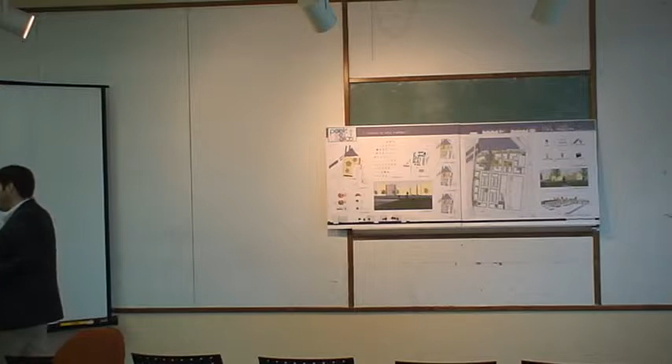I haven't started it, I've only just started fine. I'll eat peanut butter, I feel like I will eat peanut butter. Order, it's fine, eat it.

How do you spell functions? How does one spell functions?

And I got my hair done. I can do a lot of things in one night, but I can't do one. You tell me to read 10 things, I can't do it. You tell me not to do a PowerPoint cupcake, I need 10 things, I can do it.

So this is Vincent. Nobody else, right? Hey, Carolyn.

Can I spell some functions? Some what? Oh, I know how to do that.

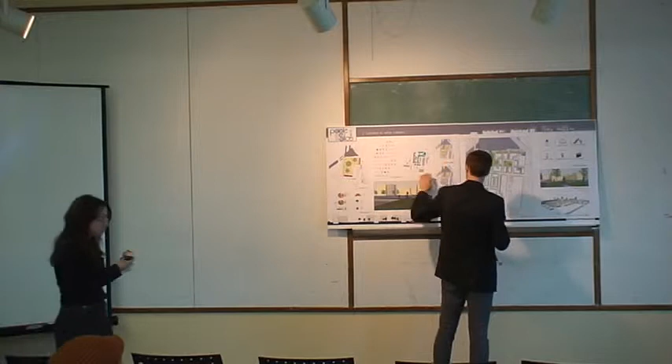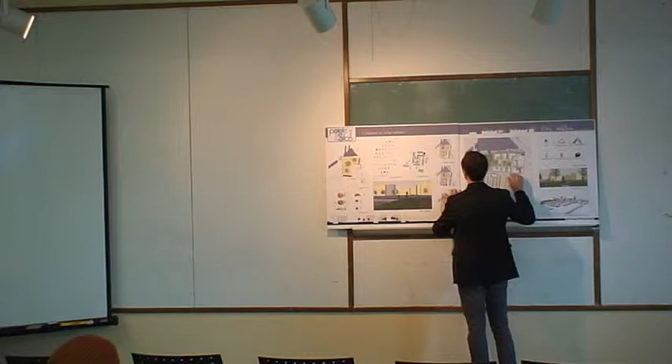You can save it as a PDF and you can still click, while I'm doing this, just in case. Yeah.

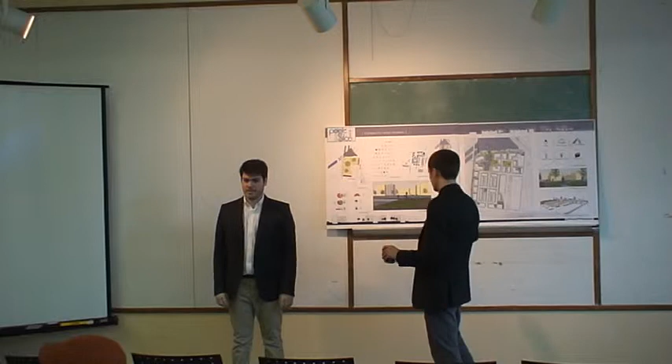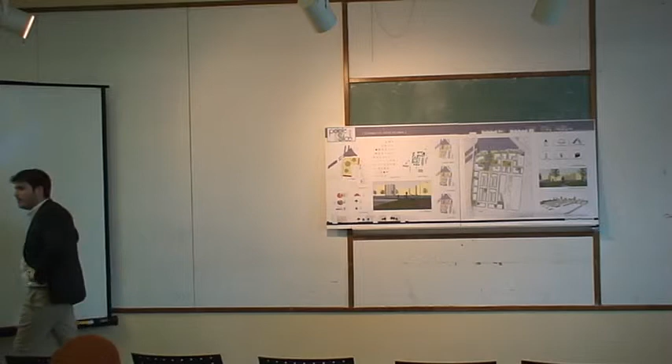Oh, wow, no, but it was kind of like, I had to get my costume first. Sorry about that, well, I guess before talking to her. No, we share. We share.

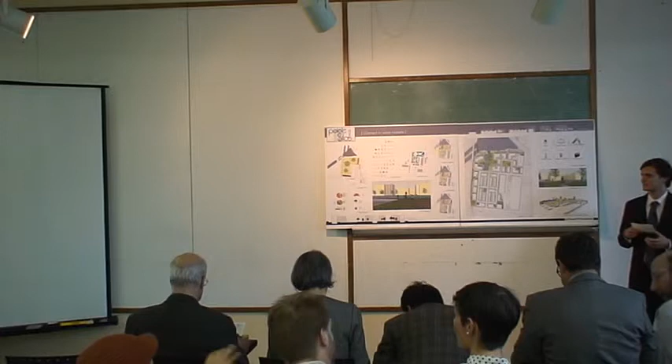Okay everyone, yes, so good afternoon everybody. Our project aims to redevelop the Wellington Basin area by transforming it from an industrial use into a mixed-use development that will have residential, commercial, and some light industrial uses.

So when we were first tasked with coming up with a design for this area, we wanted to look at the general context of the surroundings in order to better understand what needs the community have. We found certain issues and certain strengths which we really wanted to address in the design.

Three main issues stood out to us. The first one being the physical isolation of this site. There's barriers to the west in the train track. The bridge acts as a barrier to the south, and then you have another barrier to the northeast of the site.

The second issue is that of the highly mobilized community groups in the surroundings, which we thought was very important to take into consideration at the design phase. They have very high expectations as to the provision of rental, affordable, and social housing, as well as green space.

The third issue is that of the environment. Right now we know the site is very contaminated, and we wanted to make sure to design features into our site in order to remediate that situation and mitigate that risk.

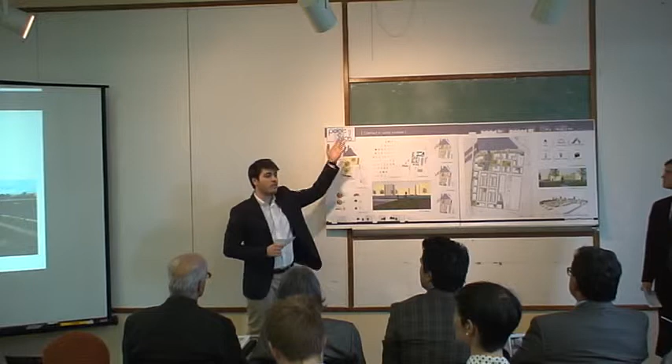In terms of strengths, well, there's the beautiful views from the site. You have views onto the canal, views onto downtown, and views onto what is now considered one of the greatest symbols of industrial heritage of Montreal, which is the Farine Five Roses sign, right to the northeast of the site.

So from this contextual analysis, we went and we decided on a vision that we wanted for this site. It was to design a project that addressed the issues of the site while putting forth its strengths. We wanted to create value for its residents and for the residents of the surrounding areas.

So what we did was we came up with 6 different guiding principles that would help us through the design phase of our project. These 6 are water, social equity, industrial heritage, the concept of human scale, the idea of the creative corridor, and retaining some employment on the site. Let me explain these different principles.

The first one being water, we have 3 main things we wanted to address with the theme of water. The first one being the importance of the Lachine Canal. We think it's very important to not only open it up to the residents of the surrounding communities and of the site, but also to bring the water into the site somehow.

During the contextual analysis, we realized that many developments along the Lachine Canal were actually closing off the canal, which we thought was a big problem. So we wanted to ensure equitable access to the canal and waterfront for all residents, which is why we created different connectors through the site to make a clear connection from the inner neighborhood into the water. The other goal was to manage our water in such a way that we would reduce the strain on municipal systems, which Christian will talk about later.

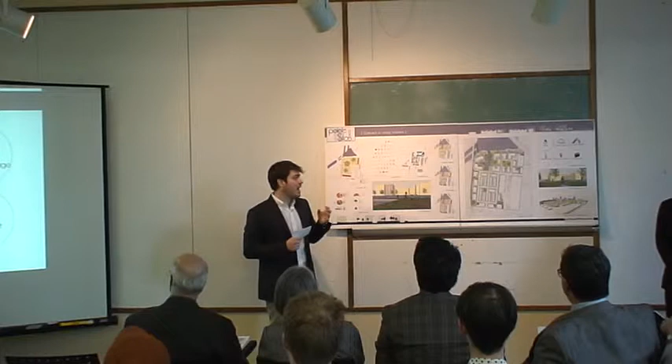We wanted to do this because, first of all, we think the presence of artists and creative types can act as a catalyst for the development of a sense of community in areas, and they could act as our pioneers onto the site. From that, we can gain a real sense of identity and character. Second, we feel we can leverage the surrounding commercial and residential developments from our regions.

The sixth and final guiding principle is that of employment. Right now, the master plan states that this site is actually zoned as a site for employment. Although we think this might not be entirely appropriate for our vision of the area, we feel that keeping some form of employment on the site is very important for various reasons.

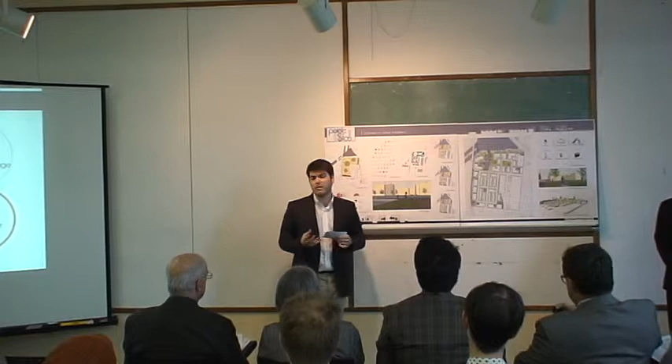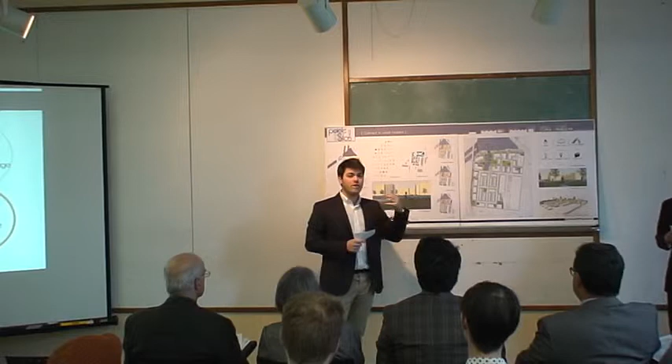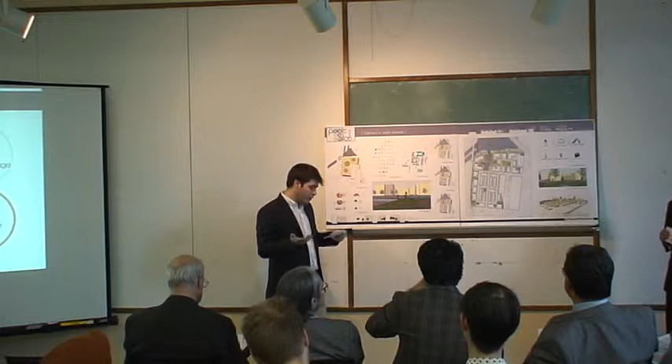First of all, we value communities where one can live, work, and play. Second, we feel that having long-term tenants right from the get-go can really stabilize the development, both financially and from the point of view of community. And third, we think it's a strong selling point both with the borough through the process of getting this project accepted, and with the surrounding community, which demands employment.

So now that I've explained these key guiding principles, I'll let Christian talk about the features that relate to these.

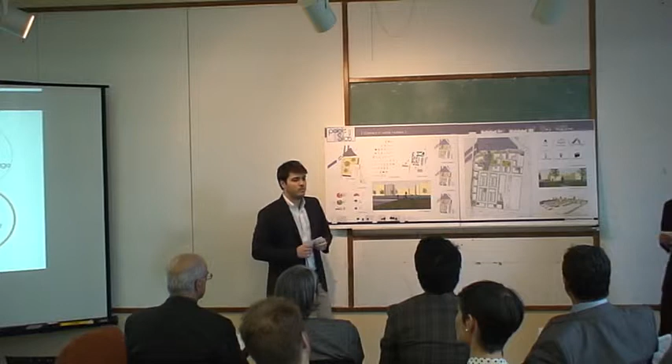Thank you, Vincent. For the purpose of explaining our six guiding principles, I'll take you through the different parts of our plan that we have identified.

The first of these, and the focal point of our neighborhood, is the Wellington Basin, located here on our master plan. We propose widening the Wellington Basin to its original width so that it could recall its importance as a key infrastructure piece in what was once the cradle of industry, the Canal Lachine. We also feel it can create value for surrounding properties if we widen the basin, which would then have good frontal access to the park and to the basin itself.

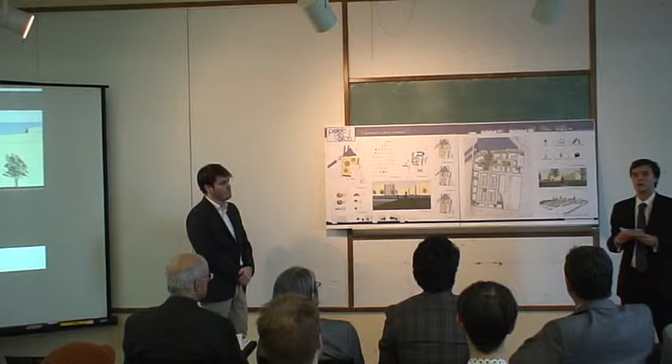Within the basin, we proposed a bioretention pond that would treat stormwater runoff and help us meet one of our guiding principles of good water management design, while potentially reducing costs of sewage management.

Moving further east, we have our second focal point, which is the old silos located here on our master plan. As you can see, we've partitioned the silos into two separate parts, the north and the south. The northern silos are retained fully as they are, but they are not inhabited.

Nonetheless, they are included in a new residential building that will give onto the canal and provide good views of downtown. On the other hand, the southern silos will be integrated into a public park, and only the base of the silos will remain, so it won't be fully built out.

We envision the landscaping of this public park could be kind of like vegetation overtaking the old industrial building. At the base of the park, we also propose perhaps something like a plaque that could recall the history of the site, while also explaining the importance of the silos for the identity of the community in the present day.

We also feel that the feel of the park would be one of a kind of transitional space where the old industrial history of our site meets the new, dynamic Pointe-Saint-Charles.

Moving further east from the old silos, we have Tate Park located here on our master plan, which recalls the existence and approximate location of the dry dock that once existed on our site.

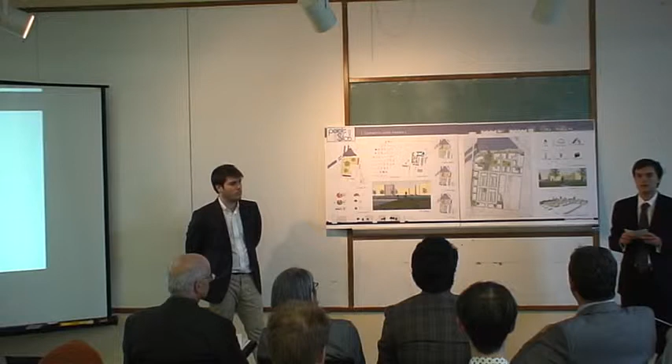We feel that it's important to provide public access to the canal for the whole community, and so there is a public access way that goes through in between these two buildings located on our site. This would include a water feature that would also serve an environmental function.

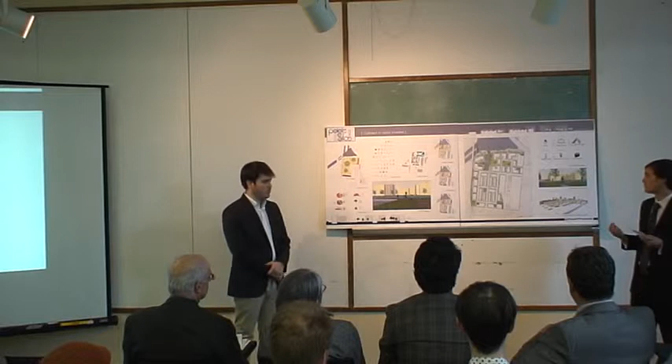As mentioned by Vincent, we really wanted to stress equitable access, and so there's access to this park from the west through this pathway, and to the east to our creative corridor, which I will explain next.

In the easternmost portion of our site, we have our proposed creative hub. Now you might ask, why here? Why create a creative hub here? Well, we have several reasons.

First of all, if you look east of our site, there is Espace VERRE located on Mill Street, which is an artisanal space. There are also two heritage-listed buildings that could also house artists in the future. So we wanted to really latch onto that as something that could define our site.

We also looked at past precedents, for example in Rosemont, where artists were included in investment proposals and actually helped create value. We thought this could help create value for our site too, and that it was a good way to do so.

But as you know, artists need one thing that is particularly hard to come by: affordable space, both to do their work and somewhere affordable to live.

We handle this in two specific ways. First, we have the old industrial building, which will be cheaper to rehabilitate since it's not new. Within this building, we're proposing to pay the first two years' rent of any artist who comes to work here, while subsidizing subsequent years, and also providing social and affordable housing throughout the site that would be available to the artists.

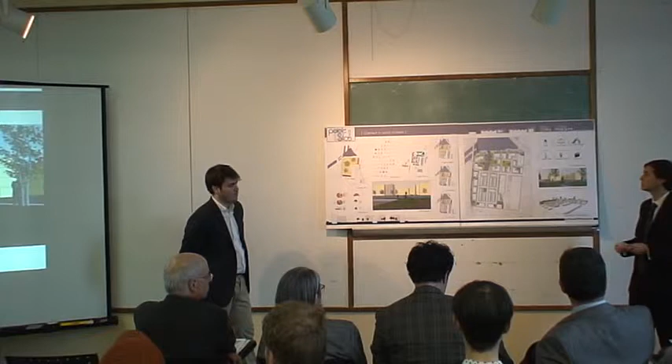I will deal now with the southern section, which stresses a more human-scale environment that is eminently walkable. So you have 3 to 4 story walk-up apartments, with apartments on each level and good backyard space. You have a nice street wall too that isn't overwhelming. This would also be our family space, and it is where, if you look at our affordability level map, most of our affordable and social housing is located.

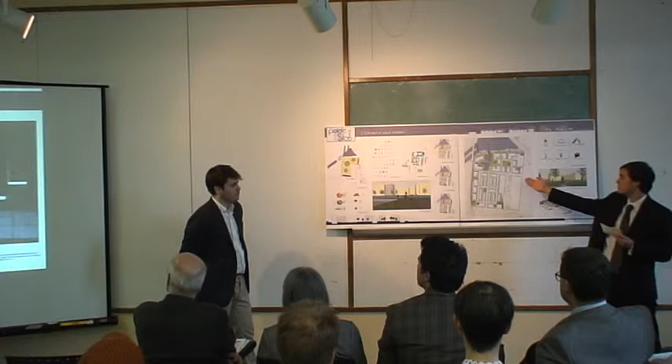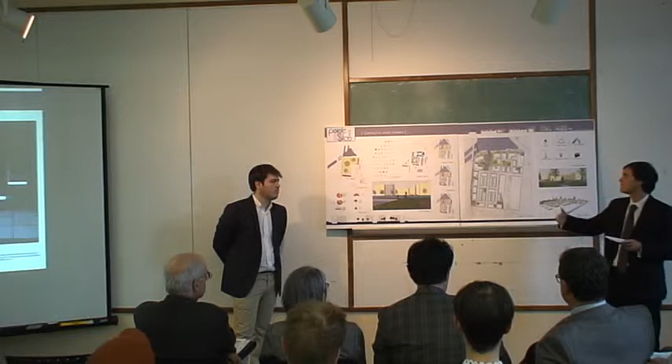Within the southern section, we have a pedestrian tunnel that goes under the railway to provide access for our residents to surrounding areas, as well as providing them access to our site so that they can visit the Wellington Basin and the Creative Hub.

Here we have a proposed green wall to hide the Loto-Québec building, which we think was kind of a barrier. It's not nice.

And as well, we have rain gardens on our sidewalks that will extend the idea of water further south because the basin doesn't go that far south, and we think that this is one of the key selling features of our development plan. Overall, the plan works by creating links between the different parts.

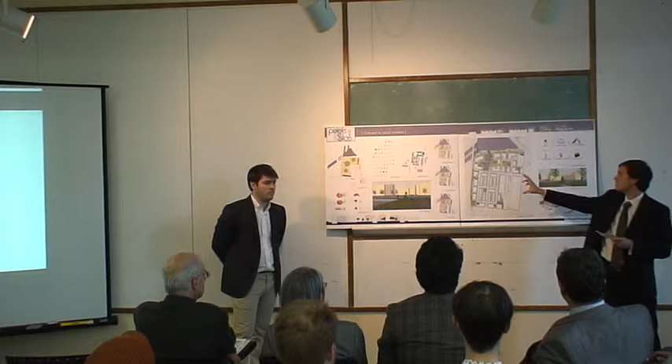So you have a link here that I described earlier from the Wellington Basin through the Tate Park to the Creative Hub. You also have a walkable grid on the south part, so we think that this is, again, a human scale environment that will work well.

Now, in terms of the financial analysis, while the 6 core principles were integrated throughout our planning, we also looked at financial viability in every step of the planning process. To do so, we sought out every possible avenue to mitigate risk.

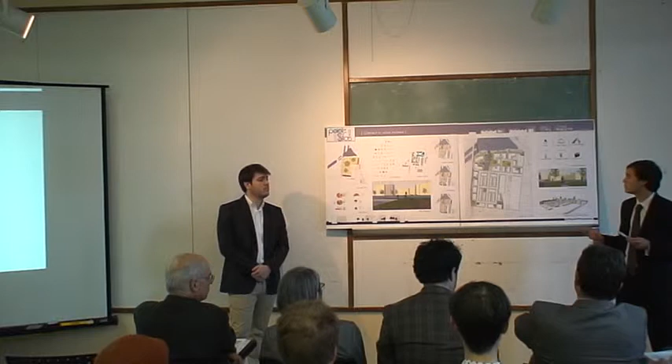For example, by including 15% social housing, 24% affordable housing, dispersing it throughout the site so that it's not segregated, and in doing so, responding to community mobilization and pressures that will want some perhaps more commitment from developers than purely a profit motive. But again, we are profitable.

And in terms of the phasing, we have a 10-phase plan, and generally it will take 10 years, we expect. But it's relatively flexible because we're planning to deliver it in portions so that not one portion has to be done right away. You can respond to market conditions.

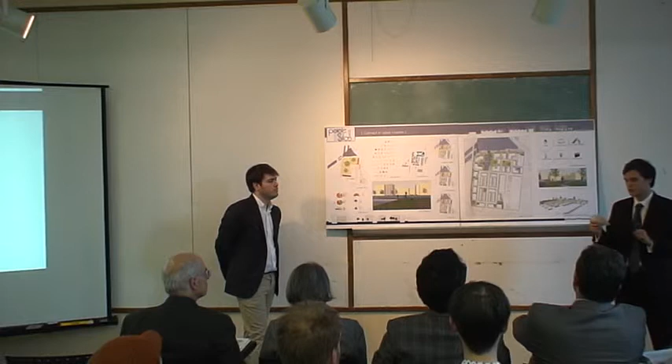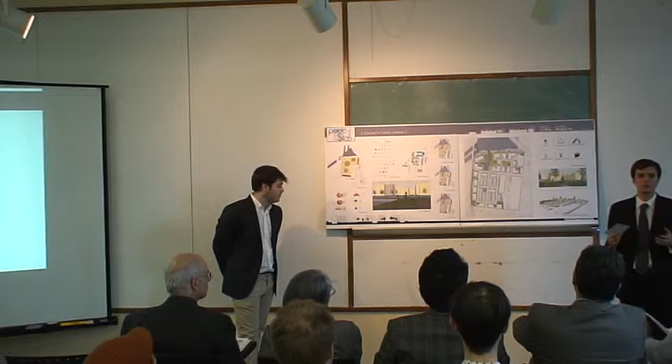And also we would start with the key infrastructure features first because they help to define the site from the get-go. So while the 6 guiding principles informed our plan in general, it will also make a project that is already very profitable, good for the community and for the environment, something that we feel is important as well. So I would now invite my teammates to come and answer any questions that you may have.

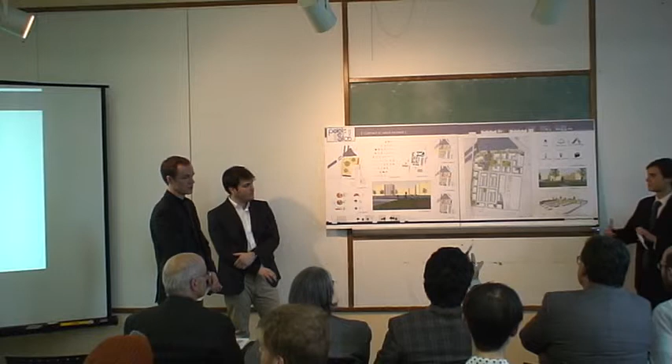Yeah, it wasn't clear to me because the borders are pretty small. After the color, where's what? Like the density and the social, and is this townhomes in the middle of the grid?

Well, yeah, just a quick review. These here were... I'll show you. Affordable, yeah. Basically, these are triplexes, all these here.

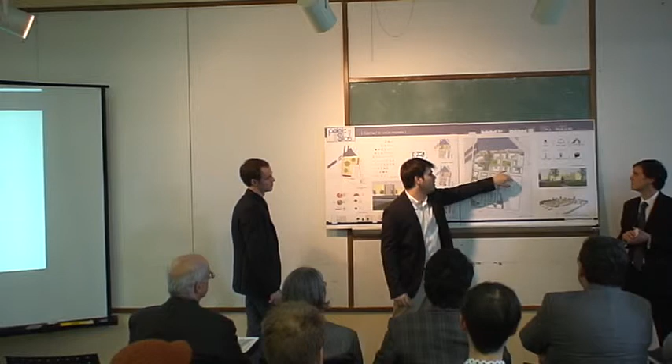And we have some 4-story walk-ups. Here we have up to 6-story walk-ups. Here is actually a mix of commercial and office use on Bridge. This is kind of more of a luxury condo development, higher, I think up to between 6 and 8 stories. We have a 10-story building here, and then a very beautiful building that's there right now, which we're keeping. We're actually changing the building adjacent to it, transforming that into some sort of office artist space.

Yeah, work loft, exactly. And then right next to it is some more of the same, and you have the social housing right around here.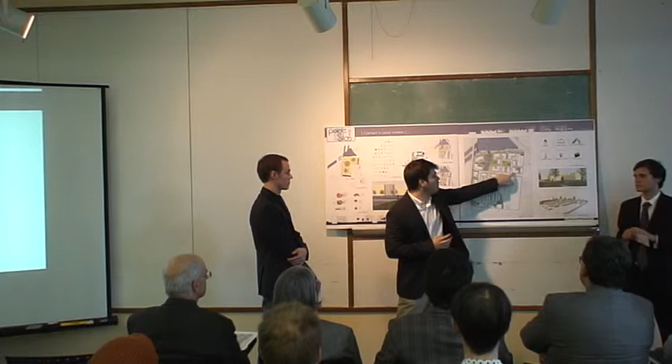No, social housing is here, and then we have some more here, here, and then this building here, which is near the parking, for the family aspect.

Yeah, that was one of the main objectives in social equity, to not segregate them. This is something we discussed also, is you reach 11% park space.

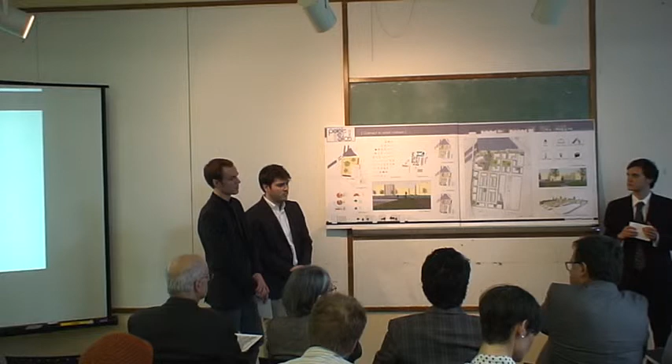Obviously you have distributed park space throughout the site. It would be interesting to see how you use those parks. Do you have a special vision on them serving different purposes? Is there one for small kids, because there's one by the Raceway on Bridge Street that looks more like leftover green space.

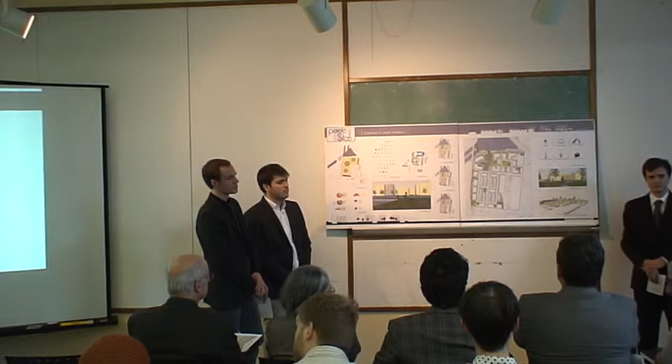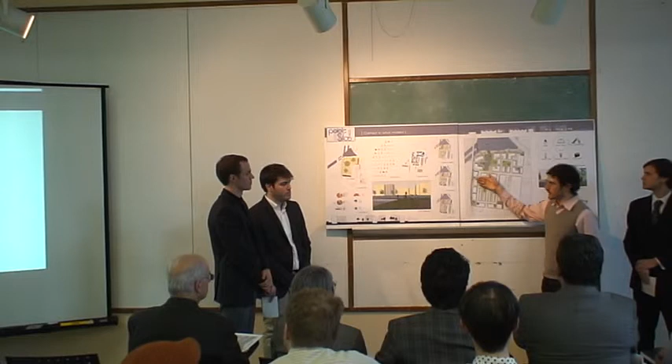Both? Yeah, so this one was basically to make the way to the tunnel more pleasant, so that it's not a scary place where no one goes.

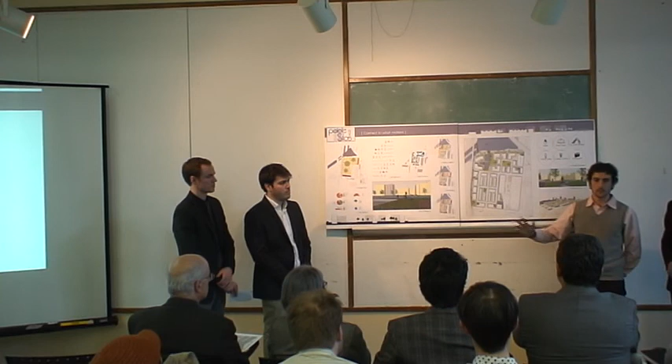The idea of having the smaller parks was again to be consistent with the idea of keeping the site to a human scale. And we feel that those parks are not actually small. If you go to Parc des Amériques, Parc des Portugais, in the Plateau in this area, they are usually 30 to 40 meters by maybe 50, and that's...